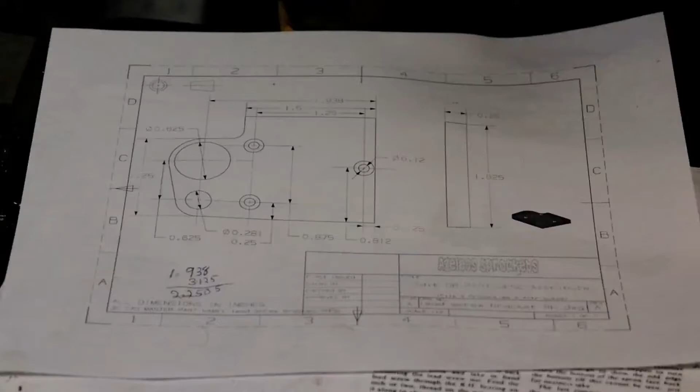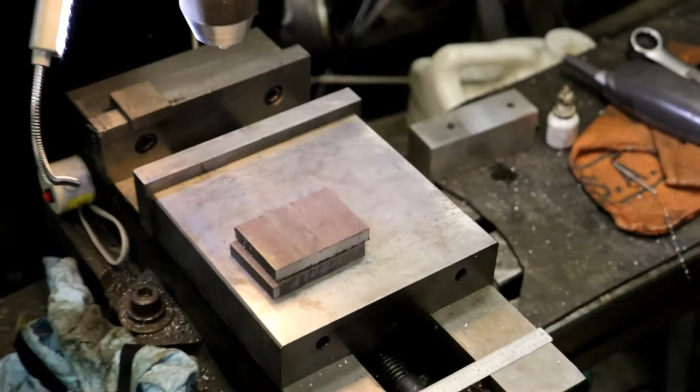Okay, I'm gonna work on hangers for the tailstock end, made out of 1/4 inch steel. I got some chunks of steel cut up here. So we'll take and size them up. What I plan on doing, look back at the drawing here.

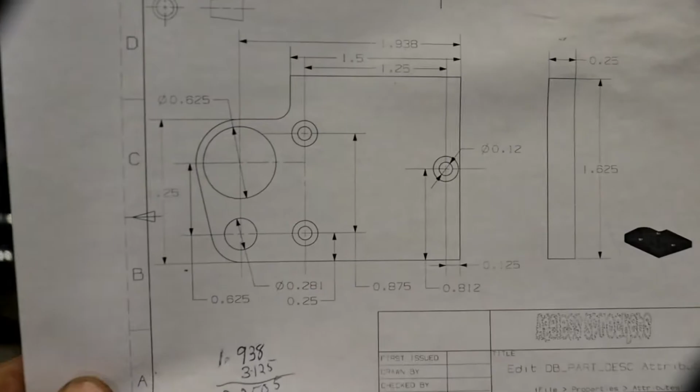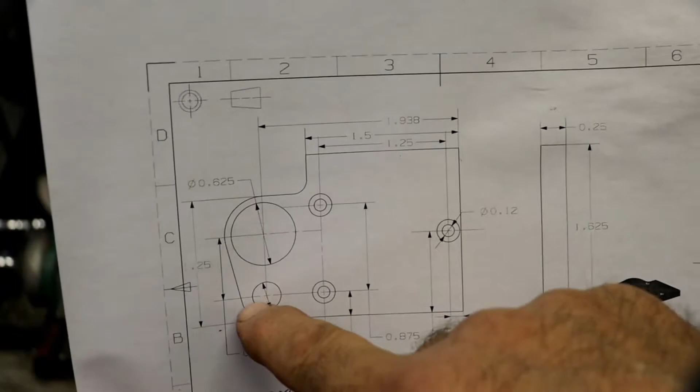What I plan on doing is taking and squaring this up to this size and cut this 125 dimension, and then I'm going to take it over on the NC machine, and I'm just going to generate that hole and then cut that side of it. That's the plan anyway. That way I don't have to get a boring bar out, but I'd rather just generate it.

And so let's get going here and get this file out. I just put them all away.

Snowing out. It's actually above zero, and it's snowing out. Yesterday was above 0 too.

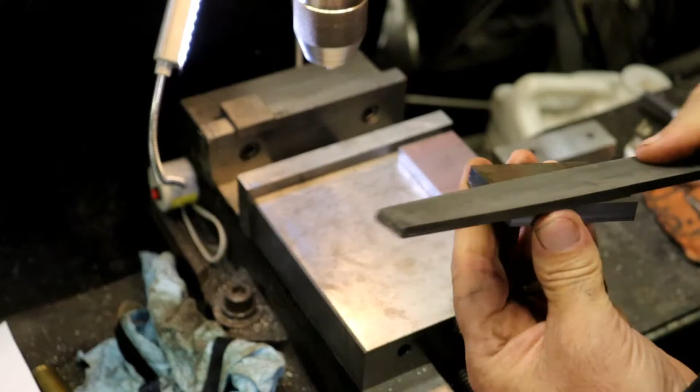Some more of that cold roll steel that's actually pretty decent material. It's just that it does have a layer of rust on it though. It's not real deep embedded rust or whatever, but lightly rusted.

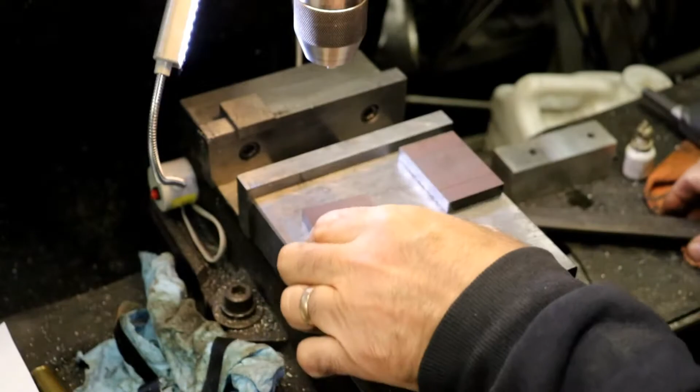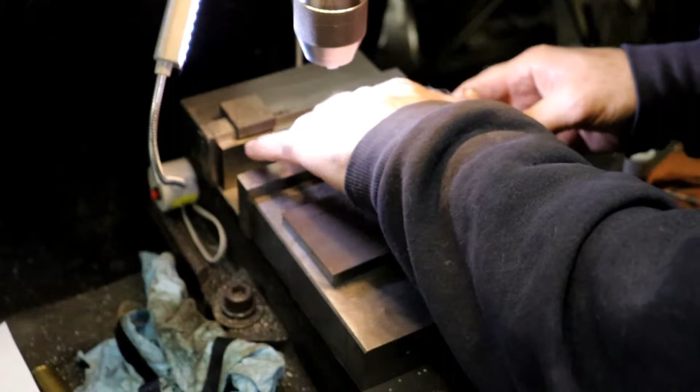Alright, I'm going to get some parallels out so I can set them in here and build the edge. Let's do here. Now I could use a spring in here. Too short. Wrong.

And then we'll stick this one on this side. So this one here is just so that the vise can't go like that and then only grip on this corner and then flip it up. You always want something close to the size or the same size. We're just going to mill the width down to size here.

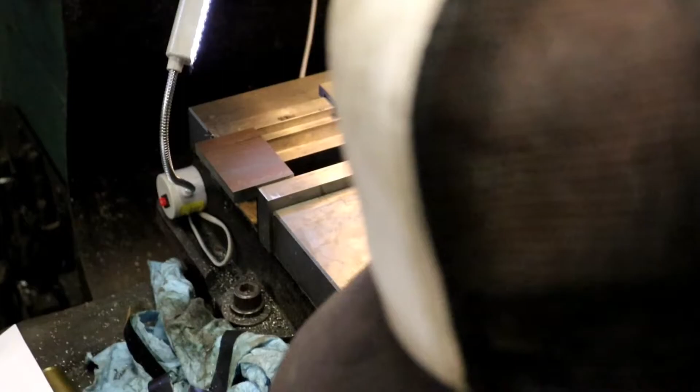We trapped both Pookie and this other one when they were younger, and took them in and had them spayed and neutered, and I built a big house for the one that stays outside, Kitty. My wife started out calling them Matt Dillon and Kitty, and Pookie would have been Dillon. He's a male. So yeah, the vet says that's actually a pretty common thing for felines.

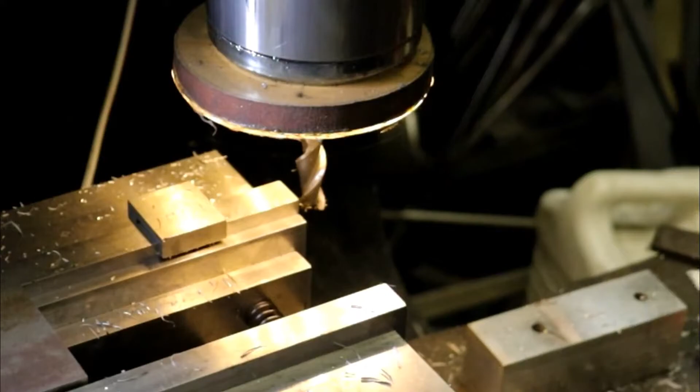All right, here we go. I shifted into a little lower speed. Take a skin cut off of here. And touch. And I'll move over about 10 thou. Keep it low. And 5. Good.

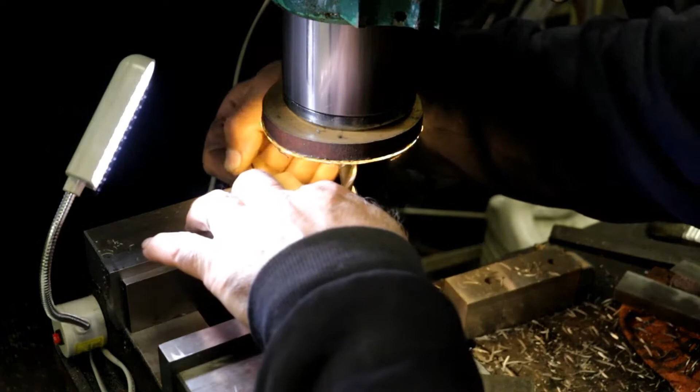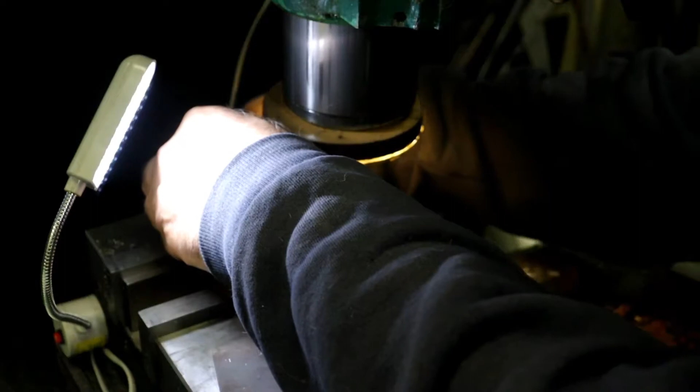And they get to roll over. Come on. All right. And about there somewhere. Get it tight. There we go.

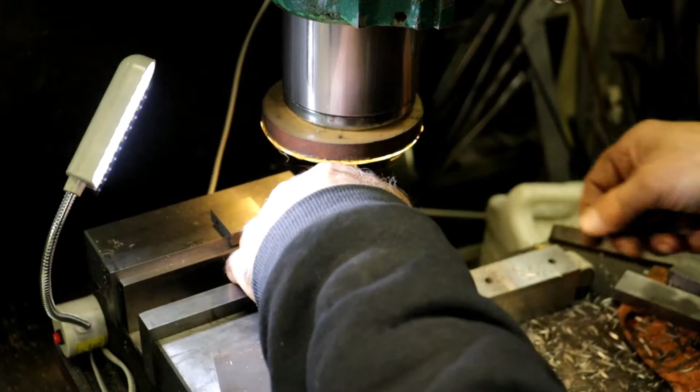Springs in here to hold the parallels in place. Okay. And actually, I'm going to stand this one up over here. Can't do that. Parallel will be in the way. All right, I'm gonna touch off. And we'll take 75. Alright, here we go. That was 75.

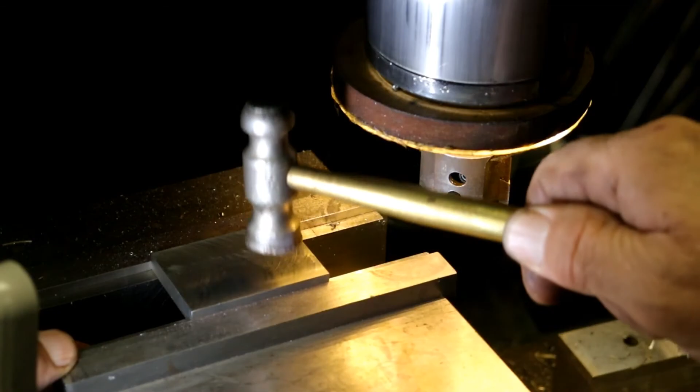Did I go through this already? Oh, that's 3. That's right. So I got 62 thou to come off of it. Yep. Put that in there. Right there. That's good. And we'll take 60 thou. Right there. I'm gonna make sure it don't hit my vise jaw. It'll be fine. Gotta cut the other side. Just looking to make sure I know which side to cut.

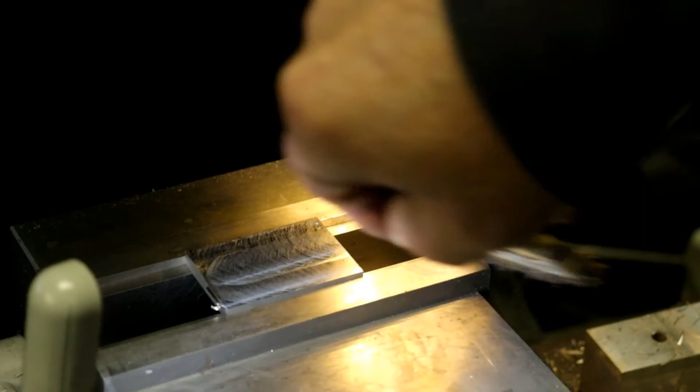All right, what do we got? 252, 251, 251, and 251 and a half. So this was the second cut. This was the first cut. Far enough.